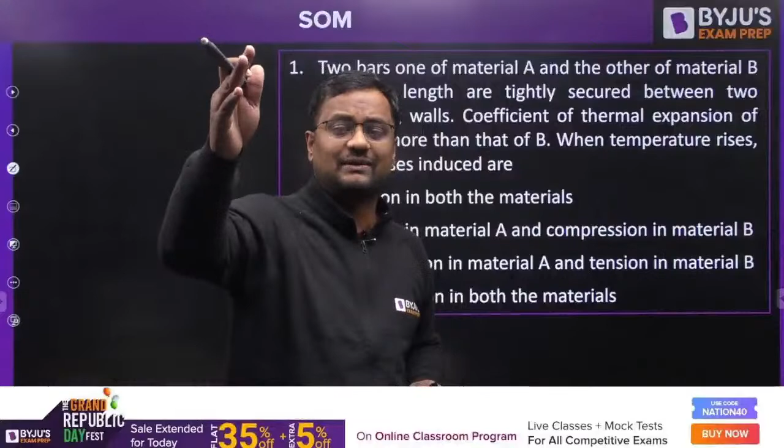Okay, now moving to the first question, guys. Please take your pen, copy, and calculator fast, and let me know the answers in the comment section so you can verify how other students are performing and how you are performing.

All the questions will be of GATE level, covering deflection, Mohr circle, every chapter—stress, strain, thermal stress, everything I'll be taking.

Here is question number 1, but wait, before that, a very important announcement. Guys, the cutoff for today's session, for SOM and FM—Joshi Sir will tell you his—but out of 25 questions, at least you have to solve 17 questions. If you solve 17 out of the 25 questions I'm taking today, then your preparation is the right strategy. 2, 3, 4 questions today, and the last, 25th question, will be a bit tricky, with higher difficulty. But on average, if you solve 17 out of 25, your preparation is exactly on the right direction.

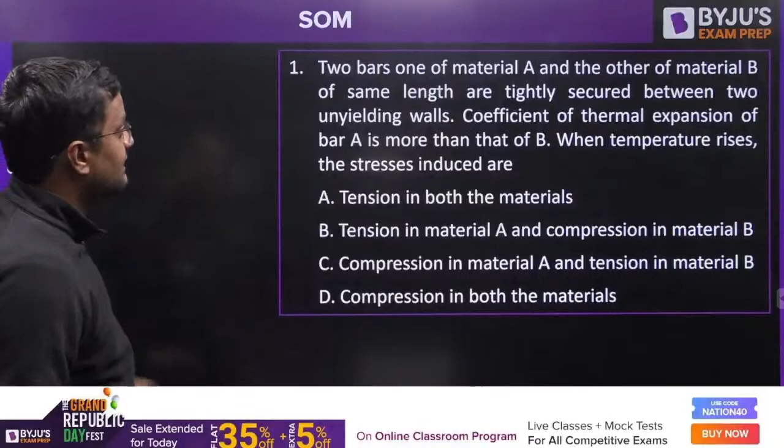Come to the question: 2 bars, one of material A and one of material B, of the same length, are tightly secured between 2 unyielding walls. Unyielding walls means there will be no deflection. There are 2 bars, one is A and one is B. The coefficient of thermal expansion of A is more than B, so alpha A is greater than alpha B. When the temperature is increased, 4 options are given.

Guys, unless I mention it, this will be MCQ, not MSQ. Because in GATE as well, whenever a question is MSQ, they will tell you explicitly—they won't play hide and seek with you. If there is an MSQ question, I will write it on the smart board or here on the screen you are seeing, just like in GATE.

So please let me know. Thank you, Santu—Santu, please share the session. Sagar Yadav, Vikram, Parth, everybody welcome, guys. Everybody welcome. Keshav, Rahul, Asha, excellent.

So many people are saying C, some are saying D. Nice question, a little tricky. Suraj is saying C—compression in A and tension in B. Aman is saying C. Santu is saying D. So who will be correct, Santu or the other students? Let me check, guys—you'll learn many important concepts and tricky questions from this session. Vishwa is also saying D. See, guys, if the question is about a composite bar, then the answer is C.

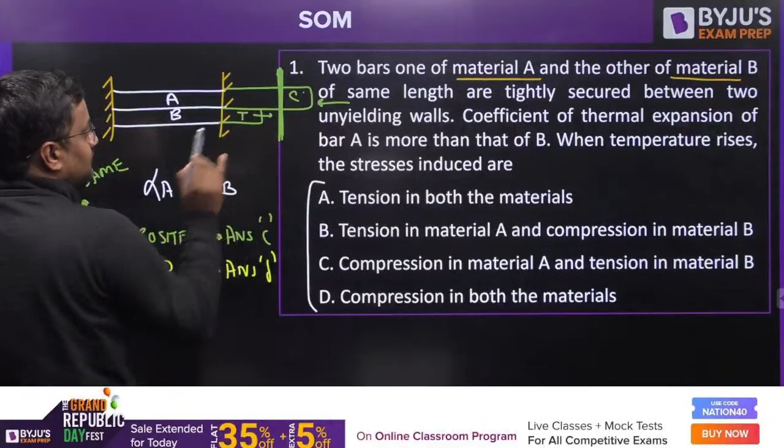Okay, but here what is written? Unyielding walls. And every time you are correcting, going for C, because you think composite, but the answer is C only in that case.

Here guys, it is unyielding, so both can't elongate by a single inch. Composite means they can elongate, but here A wants to elongate more, B wants to elongate less, but both can't elongate. So both will come into compression, and these forces will be restricted here. Both restricting here, so the answer will be...

D, compression in both. Everybody please put a heart sign if you got it.

And guys, such questions make your marks instead of +2, they will mark -2/3, that is 0.67. Everybody got the concept? Please let me know.

Yes, now the answer is coming D. These are the questions which you directly see and tick C, but the right answer is D. Everybody got it or not?

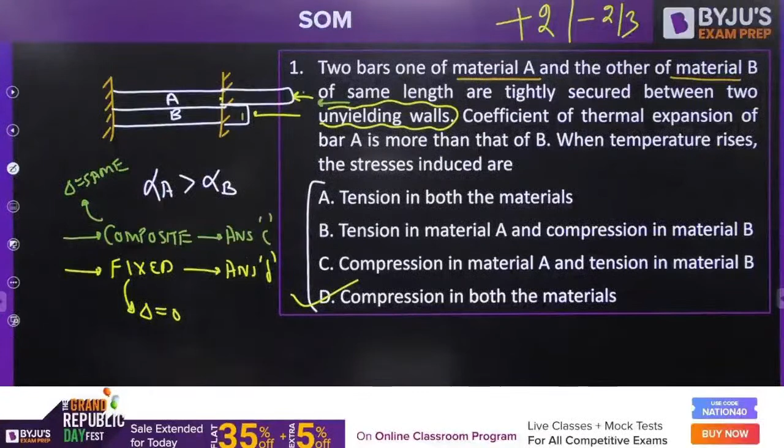Okay, and my level of difficulty will be increasing slowly. My level of this will be increasing slowly.

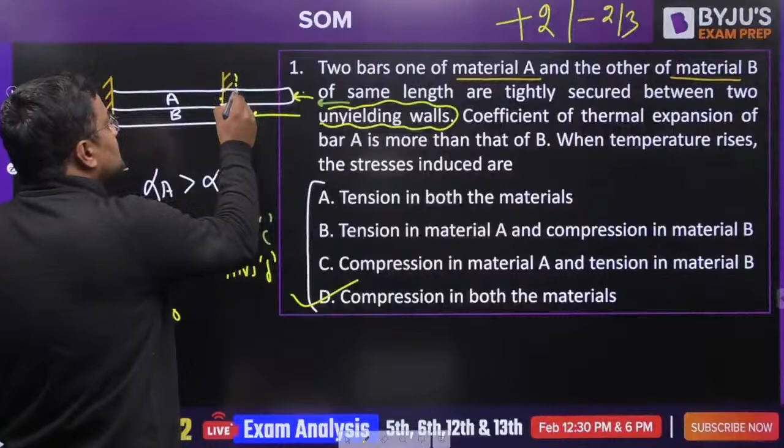If suppose, yes, Nagendra has asked a very beautiful question. If it is yielding up to this level, a very small amount, in comparison to L alpha delta T, this is the third type of concept. If it is yielding by a very small amount, very less than L alpha delta T, then also it will be compression. It is yielding up to here, it wants to elongate more, elongation more, again compression.

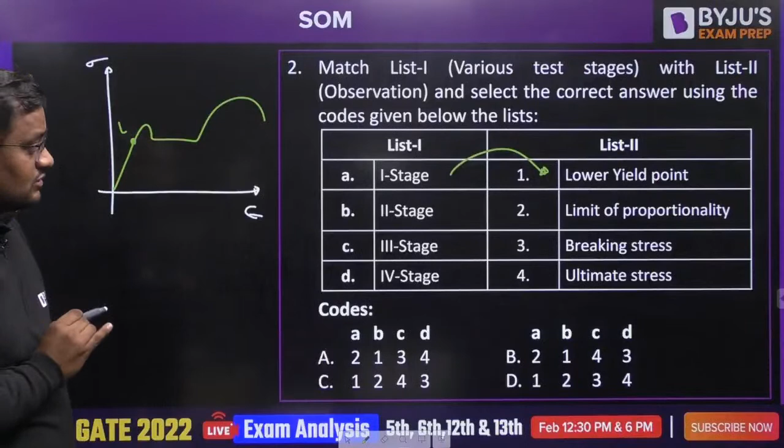Okay, lower yield point. Then after this, the first stage is the limit of proportionality. First is the limit up to which it is proportional. Then after that proportional limit, yielding comes. Here it is the lower yield point. So second is this. Then after this what comes?

Third stage is ultimate stress, sigma u. Then after this the material breaks down, fracture. Fourth stage is fracture. So it is 2, then 1, then 4 and 3. 2, 1, 4, 3. Option number B. Everybody got it or not?

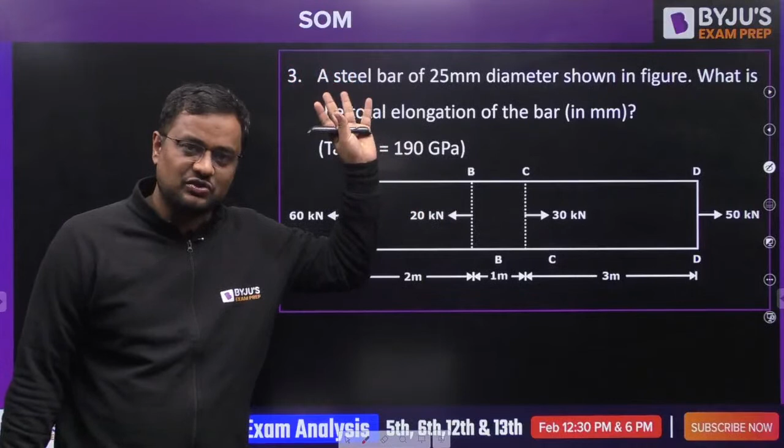Question number 3. Many of these types of questions we have done 6 or 7 months back on YouTube. Let's do this now. A steel bar of 25 mm diameter. What is the total elongation? See, guys, from childhood to now, what is my total delta? Elongation of my legs, elongation of my upper body, elongation of my head. So that is delta AB, elongation of this part, then delta BC, and delta CD.

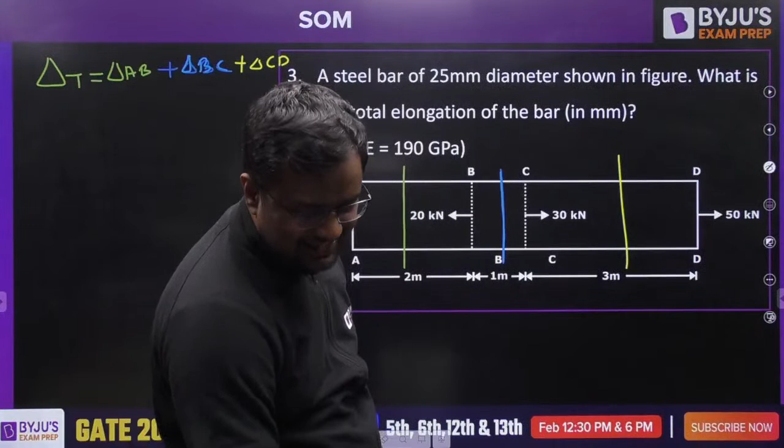Everybody please take out your calculator and pen. Then it will be beneficial. If you are only listening to me, this is not an entertainment channel. Okay, everybody khulja. Yes. Good, Santu. Please take out your pen and calculator.

Now delta AB, how to calculate delta AB? Cut your hand here, put your hand here. See from the left hand side: 60 going away. This is a NAT type question. Away going is tension, plus. 60 kN in newtons will be 60 into 1000. Length is 2 meter, 2 into 1000 in millimeter, upon area pi by 4 into d square, into Young's modulus 190 gigapascal. In proper units you can find it; I am not going into unit conversion.

And if you cut and see from the right hand side, then also 60 will be coming. From right hand side 50 going away, so plus 50. 30 going away, plus 30. 20 coming inside, inside means compression, minus 20. So 80 minus 20 is again 60. So whether you see from left or right, it will be the same.

Now delta BC. Again see from the left hand side: 60 going away, 20 going away, so 80. Length is 1 meter, area pi by 4 d square, into Young's modulus 190 into 10 to the power something. Even if you see from the right hand side, 50 going away, 30 going away, it is also again 80.

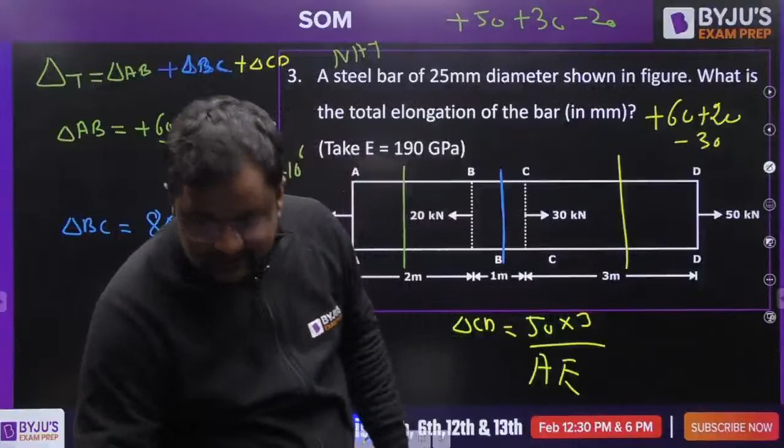Now delta CD. It is your choice. From left hand side 60 going away, plus 60, 20 going away, plus, and 30 coming inside, minus. 80 minus 30, 50. And from right hand side easily 50. So 50 into length 3. Area you know, Young's modulus you know. Calculate the addition of all these, you will get the answer. Giga means 10 to the power 9. Yes, thank you, Nagendra.

Can you do such type of questions in the GATE exam? Naak to nahi kataoge bhai meri. Everybody please let me know, got it or not? In the exam please don't do it from left and right both. Either way, the answer will be the same. Let us move to question number 4 quickly.

Okay, now this is fixed. So this is fixed means net force in y direction is 0.

Okay, sir. So force any direction. Here I don't know the force. Let it be this direction. Reaction from here, RD. And here also take any direction. If my answer comes in negative, direction will be opposite. Let it be RA. If my answer comes in negative, my direction is opposite.

So upward force is RA plus RD, and downward force is equal to 2W plus W, that is 3W. So for net force equal to 0, upward force RA plus RD is equal to downward force. Getting or not? Yes. Thank you. 3.725. Thank you.

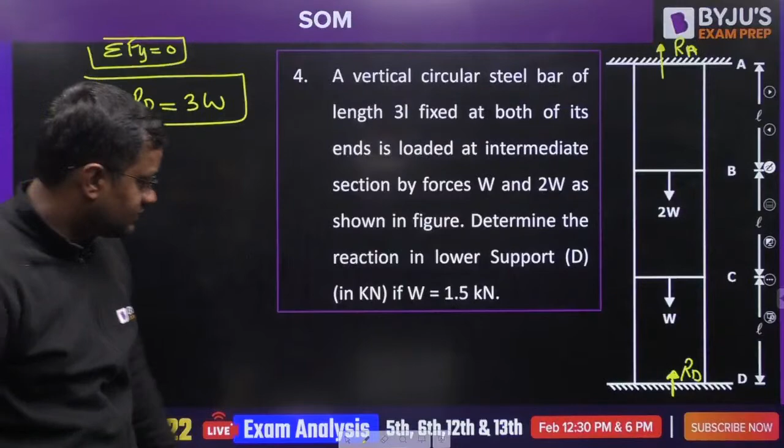Correct. Okay. Come on, tough questions, sir. Deepak, I will come gradually. Okay. Please don't teach me. Okay. Now, coming here. Okay. Deepak wants tough question. Deepak, if you don't want these questions, take a screenshot of question number 25. Take a screenshot, giving you 3 seconds. 1, 2, 3. Do this. Okay. Everybody come here. We'll move gradually. Okay. Thank you, Deepak.

Okay. Nagendra, you can make everything in SI unit. Answer will be in meter. At last, multiply with 1000 to get millimeter. Now W is 1.5, that we will take at the end. Now, since it is a fixed bar, net elongation is equal to 0, delta AD is equal to 0, and delta AD is equal to delta AB plus delta BC plus delta CD.

Okay, what is delta AB? See from top or bottom. I have just shown you in the previous. Let us see from the top. RA is going upward. So RA into L, all lengths are L, upon AE. Okay, now delta BC. See from top or bottom, your choice. Let me see from top. RA going outside, 2W coming inside. So RA minus 2W into length upon AE, plus delta CD.

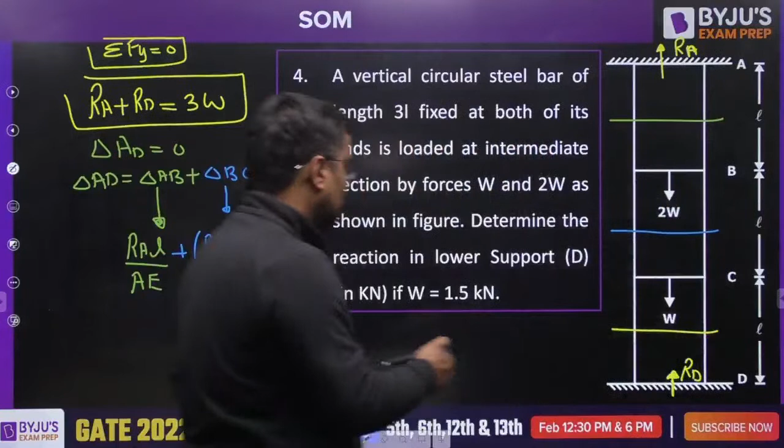Cut it here. See from top or bottom, your choice. Let us see from top. RA going outside, plus, and 2W going inside, compression, W also, so it will be minus 3W into L by AE is equal to 0. Now L, AE all are cancelled.

Okay, Bhagwan itni inki atma ko shanti de. Okay, now that is Ankit Joshi sir dialogue na.

Okay, RA plus RA plus RA, that is 3RA. And minus 2W and minus 3W, minus 5W is equal to 0. So RA is equal to 5W by 3. My answer is in positive. That means I have taken the correct direction. And what is W? 1.5. 5 into 1.5 by 3. So 3 cancels, that is 5 into 0.5, so that is 2.5. So RA value is coming to be

2.5. And RD is equal to 3W minus RA. Okay, so 3 into 1.5 is 4.5 minus RA 2.5. So from here RD is equal to 2. Everybody please let me know in the comment section. You got it or not?

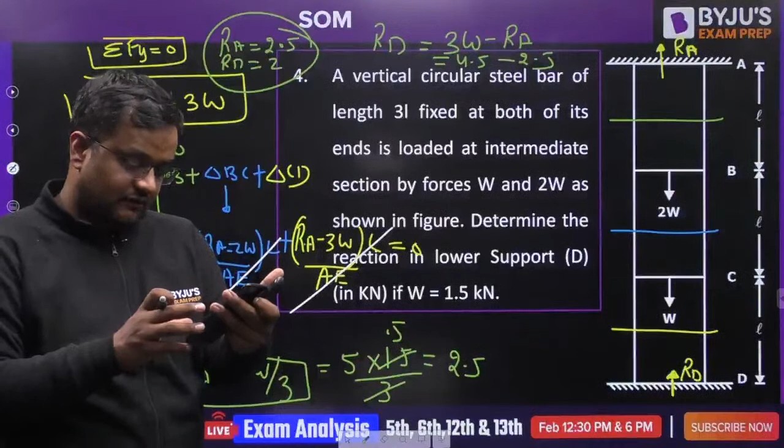Are you enjoying or not? Yes. Will you do such questions in exam or not? Yes, Santu, Rahul, good. Tough to tough. Okay, got it. Pravinder Singh, okay, good.

Question number now, guys, please be aware of the cutoff. 17th question, okay. So it is 17 out of 25 questions. And 15 questions I'll be taking tomorrow and in the YouTube channel. This is the question. Little bit the toughness is increased.

What they are asking, determine the load carried by the center wire, P1, P2. So here it is P1, okay sir. Here it is P2. Here it is P3. So total upward load on this bar is P1 plus P2 plus P3, okay. And total downward is 5 kilonewton. So to be in equilibrium, upward force is equal to downward force. Equation number 1.

Equation number 1. Okay, got it sir. No doubt. Okay, excellent. Any doubt? Okay, Kumar Gudu is saying, sir, please explain the last one, the delta calculation. We have just done PL by AE. For everything we have done PL by AE, nothing else.

For here also, see from upward, RA into L by AE. From here, see from upward, RA going outside, 2W coming inside, L by AE. For here, see from upward, RA going outside and 3W coming inside, like this. Everybody please let me know the answer fast. Kumar Gudur, I hope you got it now.

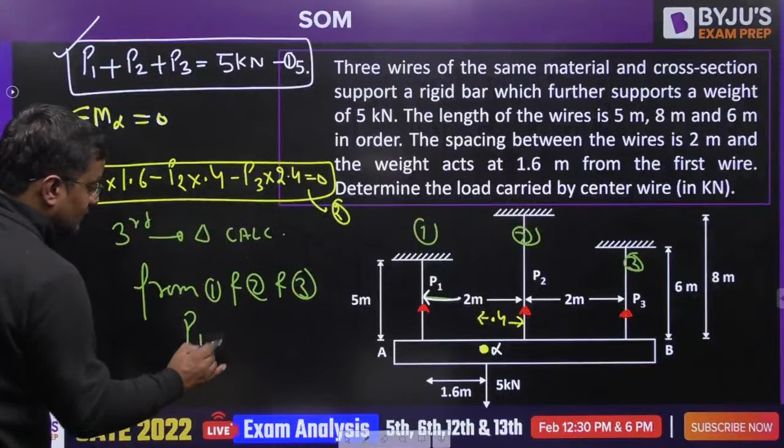So the third equation will be the delta calculation. From equations 1, 2 and 3, calculate P1, P2 and P3. And guys, wait. This question requires a certain amount of calculation and exercise.

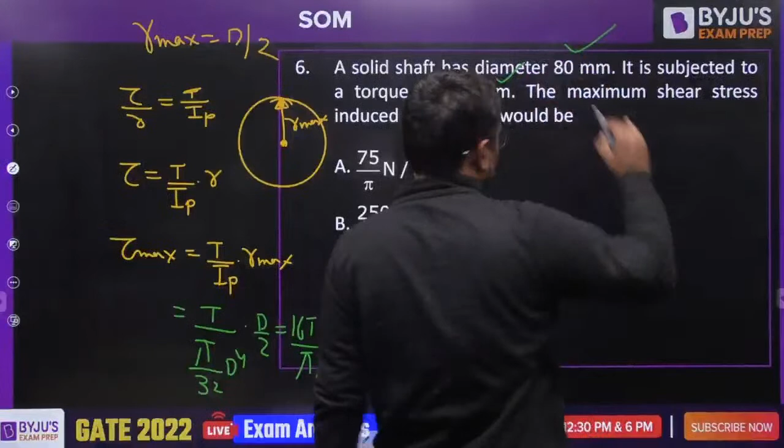So, here it will be T. IP is polar moment of inertia, that is pi by 32 into D to the power 4. R max is D by 2. If you simplify this, it will be 16T by pi D cube. Now, D is given, T is given, so you have to calculate 16T by pi D cube. T is 4 and D is 80 mm.

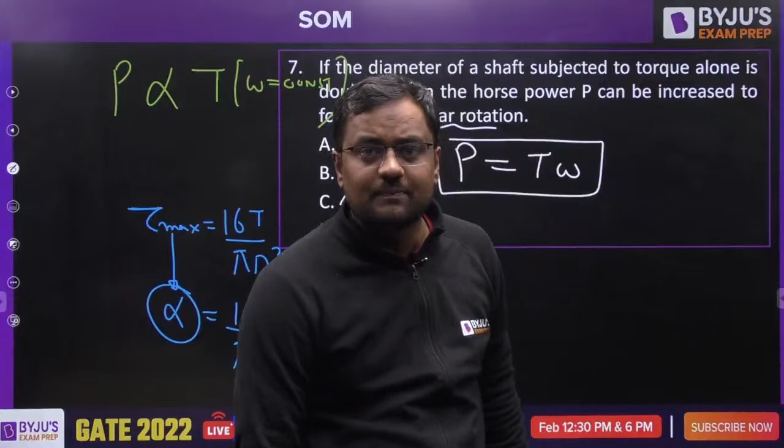Earlier it is alpha. Now since diameter is increased by 2 times, that is 8D cube, so we can increase torque by 8 times to make it the same value. Even if we increase the torque by 8 times, tau max is not exceeding the permissible value, so it will not fail. So T can increase by 8 times, and it will be 8P.

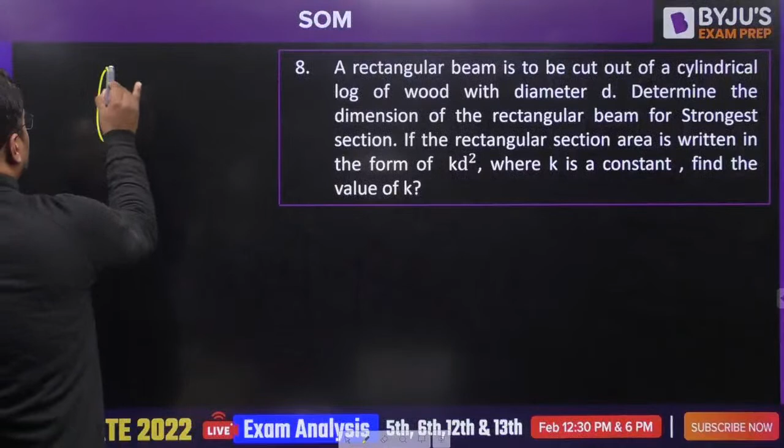Now question number 8. A rectangular beam is to be cut out of a cylindrical log of wood. Guys, see, this is a cylindrical log of wood. Now if I cut here, the cross section will be like this. How many rectangles can be cut? The rectangle may be like this, or like this, or like this. Guys, infinite rectangles can be cut out.

Infinite. Now, out of these sections, red, green, white, blue, purple, orange, dark blue, light blue, turquoise, out of the various colors in this universe, let I say that this one is the rectangle having width B and depth D to be the strongest of the various sections. Now for this strongest section, what is the value of B and D?

Because they are asking area, area will be B into D. And let it be not D, let it be H, because they have given the diameter as D. So diameter of this section is D, and I am taking this as H.

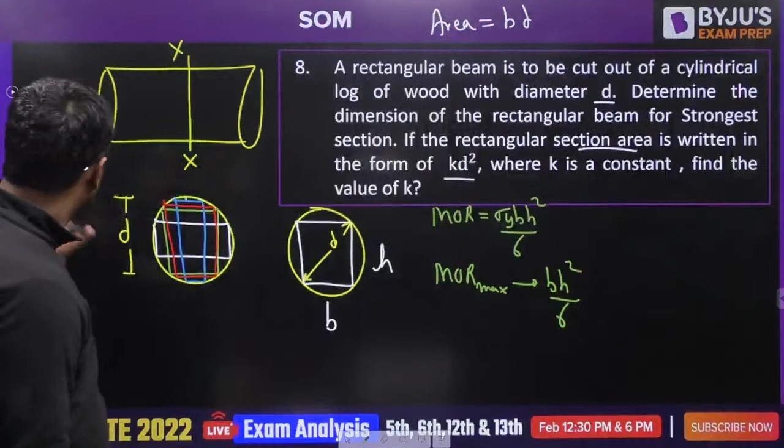Okay. Now here Pythagoras theorem you also know, I also know: B square plus H square is equal to D square. Now this is maximum. Now I can write BH square by 6. H square I can write as D square minus B square, by 6. Agree or not? Now this is Z. Actually this is section modulus Z.

So for maximum Z, dZ by dB is equal to 0. So what is differentiation of that? 1 by 6 BD square minus B cube. D is constant diameter. B cube differentiation is 3B square, equal to 0. D square is the constant. 1 by 6 will be cancelled out, and here B square is equal to D square by 3 and B is equal to D by root 3.

Now put this B is equal to D by root 3 value here and find H, and area will be B into H, because I have treated depth as H. So B you have calculated from here, H you will calculate from here, area will be B into H. Everybody please let me know, have you got it or not?

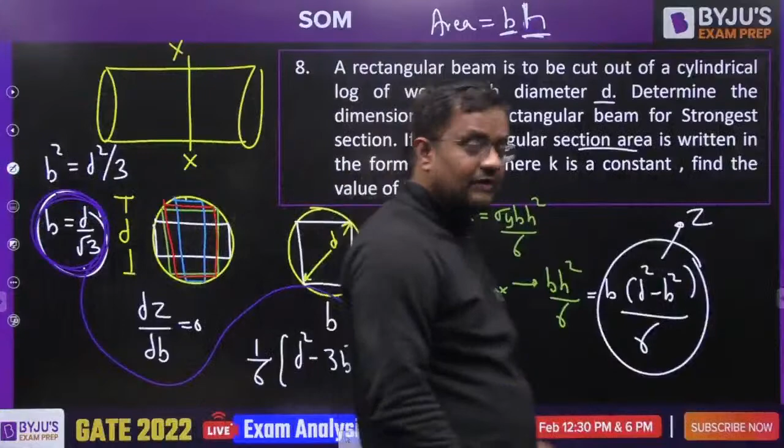Am I audible or not? Let me check on my mobile. Completely audible. Guys, I have told you the process. Have you got it? Any doubt? Shreyas, I am audible in my mobile, and I guess my mobile is much cheaper than yours. Okay. So it is audible on your mobile as well. Any doubt? No doubt.

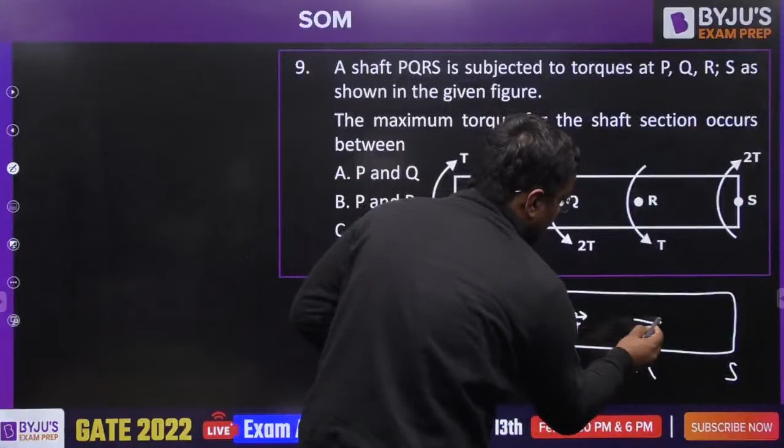Curl your fingers like this. Thumb will be like this. So at Q, curl your fingers, thumb will be there, so it will be 2T. Again curl your fingers, this will be here. Everybody getting this right hand thumb rule or not? Now curl your fingers, it will be here.

Okay, this is 2T. So net torque to the left hand side is T and 2T, 3T, and towards right hand side 2T and T, 3T. It is balanced. Now what is the benefit of right hand thumb rule? If I want to calculate torque at PQ, see what is the use. Everybody knows how to apply right hand thumb rule now.

Everybody knows now how to apply right hand thumb rule. Now what is the benefit? Benefit is like that. Now if I want to calculate torque, now it is easy for me to visualize. Otherwise here it will be difficult.

See how to visualize? See PQ. From left hand side, T going away, so plus T from left hand side. From right hand side always, 2T going away plus T going away plus 3T, 2T coming inside. Again, 2T going away plus T going away plus 3T and 2T coming inside. So net is T, from any side. And your sign convention might be different, you take outside going minus, inside coming plus. That is also acceptable.

So now I am calculating T in QR region. Cut here, you can take any sign convention. T going outside, from left hand side, and 2T coming inside. So net is minus T. Your sign convention may be reverse, that is obvious. From right hand side, 2T coming inside minus, and T going outside. So net is inside coming T. Somebody take it plus also, that is acceptable. So here it is T, here it is also T.

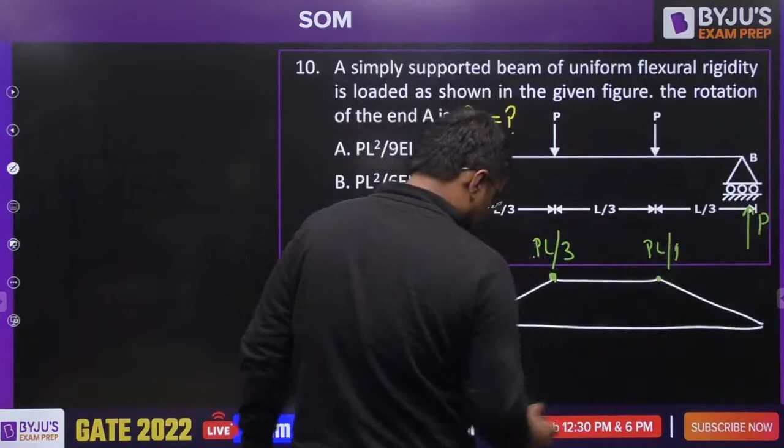Please let me know answers on the comment box. PL by 3. And M by EI diagram, I'll divide by EI here. I will be dividing by EI. Got it? Please let me know the answers. PL by 3EI, PL by 3EI. This is M by EI diagram.

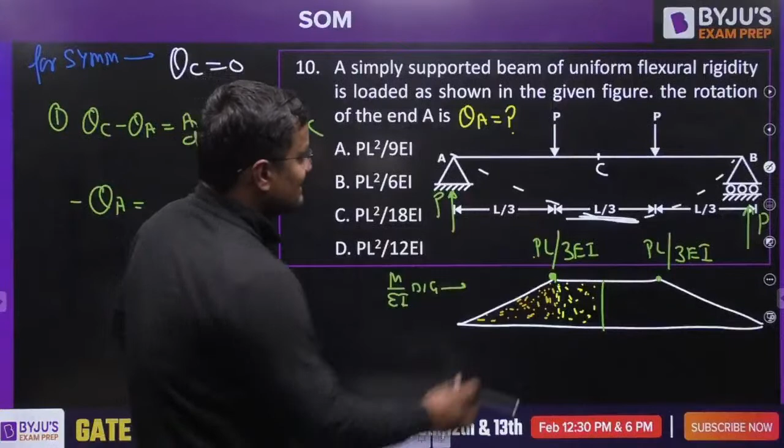Okay, what is this distance? L by 2 minus L by 3. L by 2 minus L by 3 is equal to, taking LCM 6, 3L minus 2L, it is L by 6.

So this area is L by 6. What is that yellow area? L by 6 into height, that is PL by 3 EI. Okay sir, got it sir.

And what is orange area? Orange area is half base. Base is L by 3 into height. Height is PL by 3 EI. So this will be PL square by 18 EI, and this will be PL square by 18 EI, so it will be PL square by 9 EI. That is option number A.

How many of you are correct here? Here is the telegram, and for that homework question I'll be posting the solution exactly at 11:30. Just let me know.

Parth was correct, good Parth. Good Somprit. Every commando is here, yaar. Here are the real audience who are doing most of the questions correct.

Are you enjoying this session so far, guys? 25 questions. See, deflection we have done till now. We have done deflection, we have done thermal stresses, and now Mohr circle is also coming, guys, with some beautiful new type of questions.

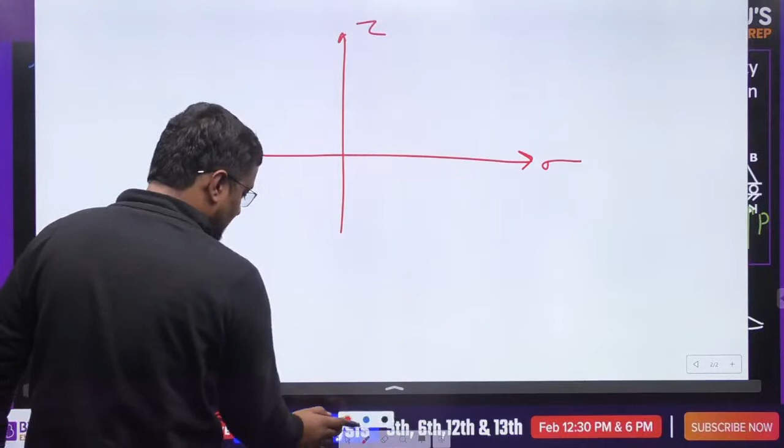Mohr circle for a point is like this. This is 20 tension and this will be minus 30, meaning this and this. What is major principal stress here? This is 30. Let me check how strong are the commandos here.

Okay guys, major here is this one, this one is major and this one is minor. Major does not mean that on positive side. SOM negative does not mean less, it means different direction compression.

Okay, this one now. Everybody, the propped cantilever is fixed at a nice question. Okay, this is a propped cantilever, fixed at A and propped at B. Okay sir, okay sir.

Now what is happening here? UDL of 1 ton per meter, that is W, W is this. What is the reaction at B? What is RB? They are asking, what is RB?

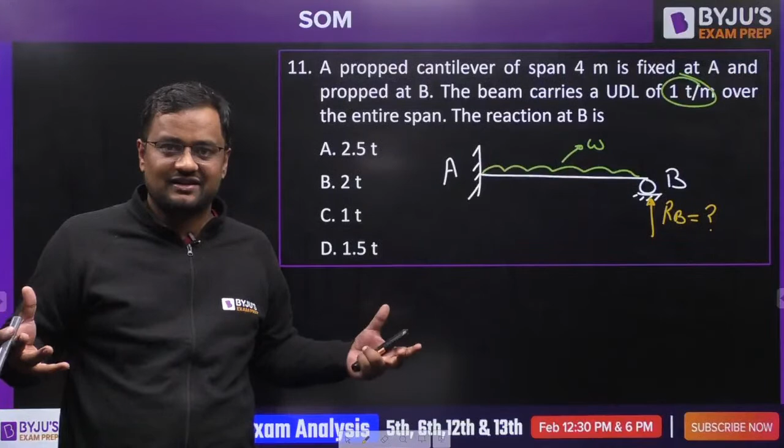Everybody, 30, 40, where did that come from, Ishan? Where did 40 come from? What have you had, brother, give me some too, having a lot of fun. Ishan, where did 40 come from? 20, and the fight between 20 and 30, how does 40 come? Okay, you are saying just like BJP and Congress are fighting for election, and suddenly AAP is winning, that happens in Delhi, but not here.

Okay now guys, see, the actual deflection at B is equal to 0, yaar, because B is the support. At B it is a support, so delta B is 0.

Now this UDL, green color UDL, is putting it downward by this amount, and RB is putting it upward by this much amount. RB into L cube by 3EI. Now both cancelled.

Jai ho, now from here you can find RB. From here RB is equal to 3WL by 8. L is given, W is given, 3, W is 1, L is 4, by 8, so from here D is the option.

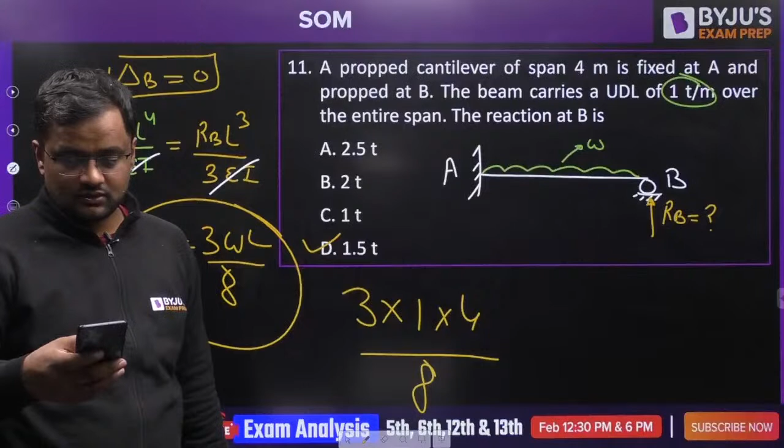Can you do such questions in exam or not? It's okay Ishan. Can you do such questions in exam or not? Everybody please let me know. Can you do such questions in exam or not? Okay, you won't embarrass yourself, right? You won't embarrass yourself? You'll manage it?

From here, you can get the answer.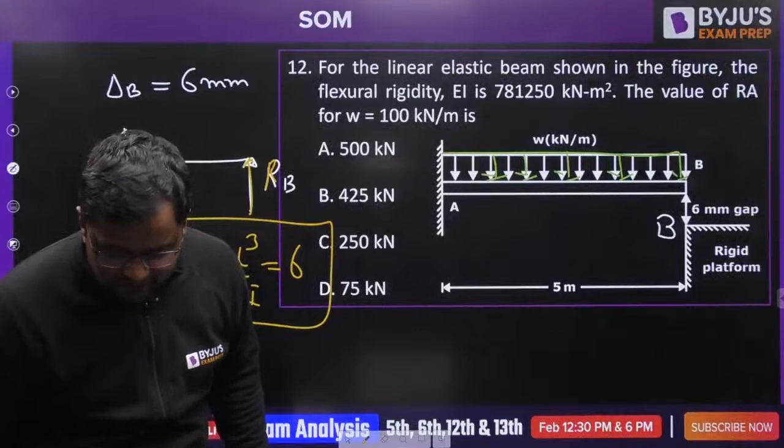Everything is written. Net elongation is 6 mm. I'm not wasting your 5 to 10 minutes in calculation that you can do on your own, guys. Just let me know, are you able to solve such questions in exam or not? That is my motive right now. Don't focus on my energy, whether I'm putting more or less energy. Go in the concepts, go in the questions.

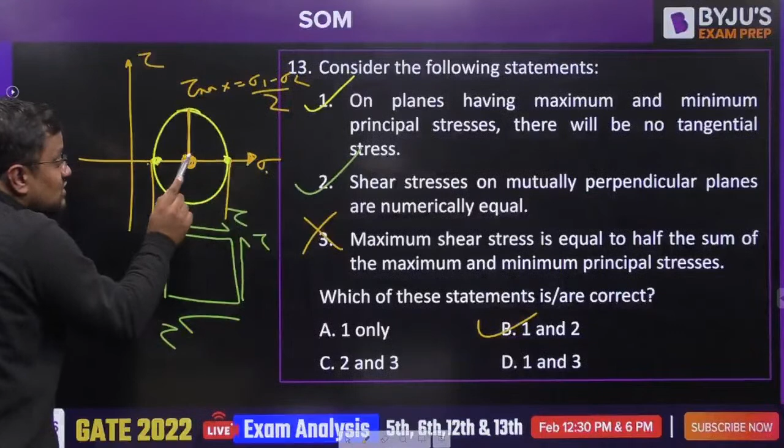Sorry, what is the normal stress on the plane of tau max? What is the normal stress, x value, on the plane of tau max? Then option 3 will be correct. This value is sigma 1 plus sigma 2 by 2, but tau max, the radius, is sigma 1 minus sigma 2 by 2. Everybody got it or not?

I told you, okay Anurag, I told you when the answer will be 3. When the answer will be 3, when it is asked not maximum shear stress, if they ask normal stress on the plane of tau max, then this will be correct.

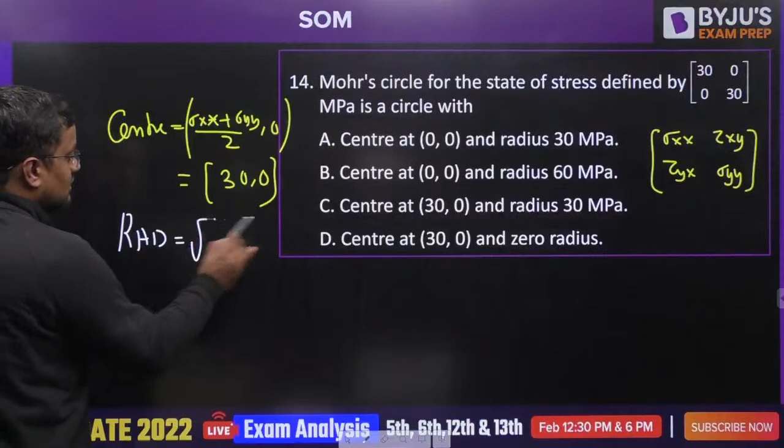Okay. Now, what is the center? Center is sigma xx plus sigma yy by 2, 0. So it will be sigma xx plus sigma yy, 60 by 2. That is 30, 0. Okay. And radius is under root of sigma xx minus sigma yy by 2 whole square plus tau xy square. So sigma xx minus sigma yy by 2 whole square, that is 0. So it is equal to 0.

So how will this look? Let me tell you. The center is 30, 0. And since both principal stresses, sigma 1 and sigma 2, are 30, both are same. So it is not like this. If it is like this, then the principal stress here is different, here is different. Here both are same. And why are they principal stresses? Because tau is 0. So center 30, 0 and radius 0. D option. Everybody is correct here.

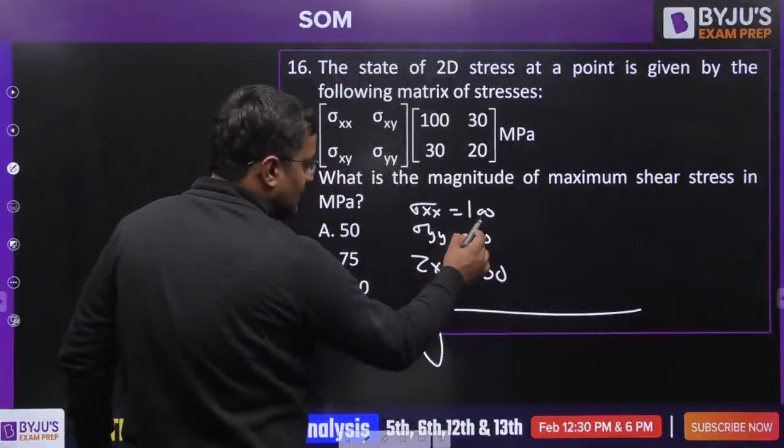Now, what is the magnitude of maximum shear stress here? Again, sigma xx is equal to 100, sigma yy is equal to 20, tau xy is equal to 30. Applying the same formula again, sigma xx minus sigma yy by 2 whole square plus tau xy square. So 100 minus 20 is 80, by 2 is 40, 40 square plus 30 square. Not wasting time here.

Question number 17. This one is a little bit tricky. Let us see who can do this question. Everybody, this is a little bit tricky.

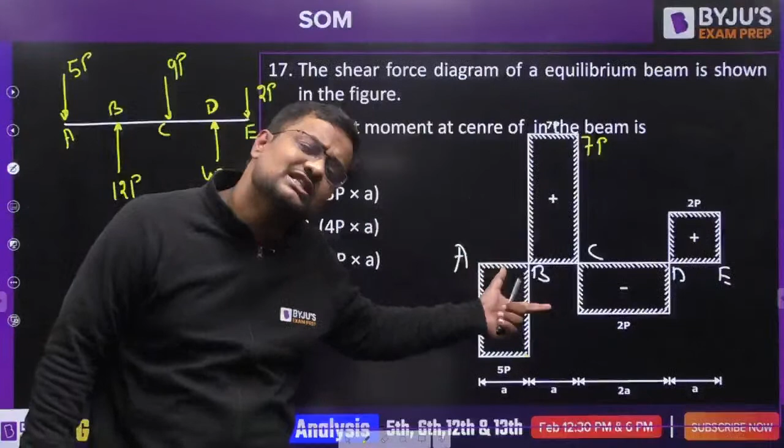The diagram we obtain from the SFD will always satisfy force equilibrium. Let us see. Downward 5P, 9P, 2P. 5, 9, 14 to 16P downward. And upward is 16P. So it is balanced. It will always satisfy force equilibrium, whether it satisfies moment equilibrium or not.

Now, the net moment for a body in equilibrium will always be 0. Guys, in SOM many times I ask my students what is the moment here at support A. They say PL. No, the moment is 0. This P upward, this PL here. So P into L clockwise, this PL anti-clockwise. Net moment from right and left both is 0. Even here also the moment is 0.

From the right hand side, if you take L minus X or whatever distance, at this point also it will be 0. Calculate from right and left, it will be 0. So without doing all this calculation, I can directly write the answer as A. Got it or not?

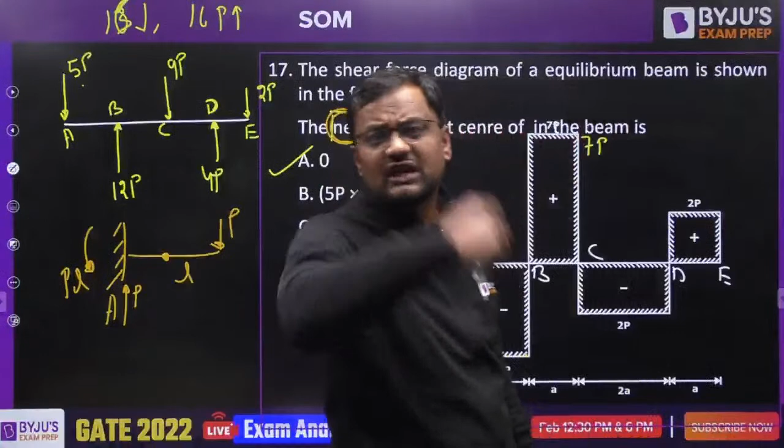It's okay. Enjoying, guys? 17 questions we have done till now. Moving to the 18th question. Beautiful question. Let me tell you what the question is. Now see, this is a simply supported beam. On this simply supported beam, there is a column, and the column is having some weight P. Let it be A, let it be B, let the center be C, this be D, this be E. What is the shear force at C?

Beautiful question. A beam has a column. Now, how to do such questions? Everybody, Tanveer, please see. This is B, this is A, and the load is actually acting as a UDL over it. See, guys, this on my hand is a point load. This marker on my hand is a point load. But this is the remote, and if I apply load like this, the point load is on the remote.

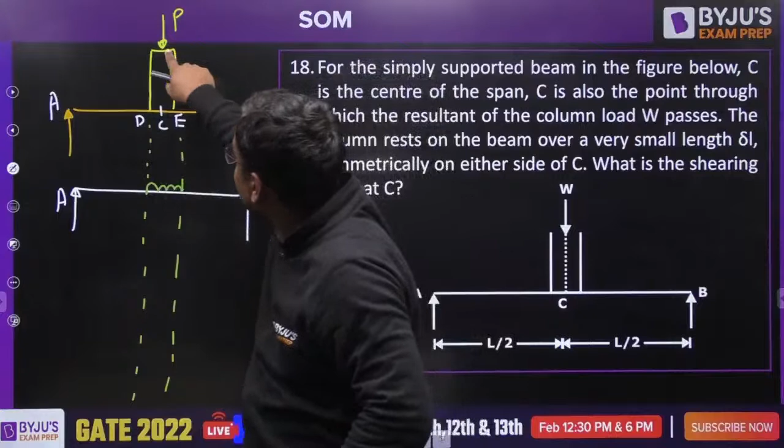Point load is on the remote. But on my hand it is applying UDL. So it is not asking the shear force of this place. For this place it is point load. But for the DE region it is UDL, like this.

Now if you make the shear force diagram, many times I have done this. From the AN method you can do it in just 2 seconds. Abhinav Negi AN method, you can search it on YouTube. Bending moment diagram is like this. And for every symmetrical question, SFD is always anti-symmetrical and BMD symmetrical. So shear force is 0 here.

Everybody understood this or not? Enjoying Avinash, Parvinder, Dinesh, Naresh, Meena, Anurag, everybody enjoying the session or not? One question was homework that I'll be giving you in my Telegram, Civil by Abhinav sir.

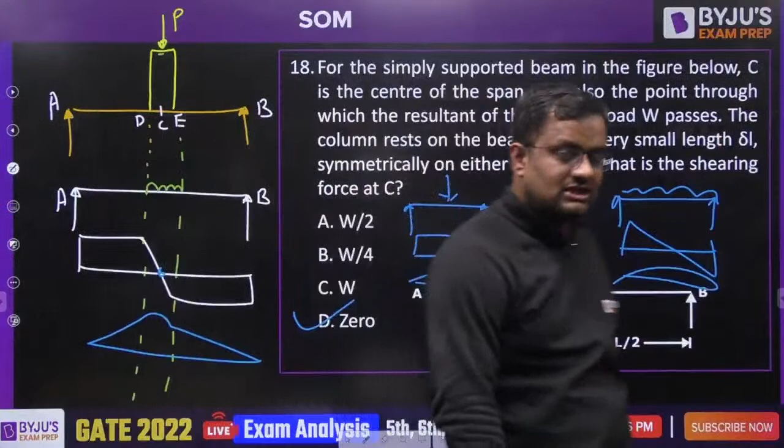Everybody, are you feeling excited, energized, and are you getting something? Out of 18 questions till now, how many are correct? Please let me know in the comment section. All civil and mechanical champions, how many correct? Dinesh is saying 0. Okay, Bhavi is saying 18, Anurag is saying 15. Excellent. Parath is saying 9, Rishi is saying 10. A couple of people have already reached the threshold.

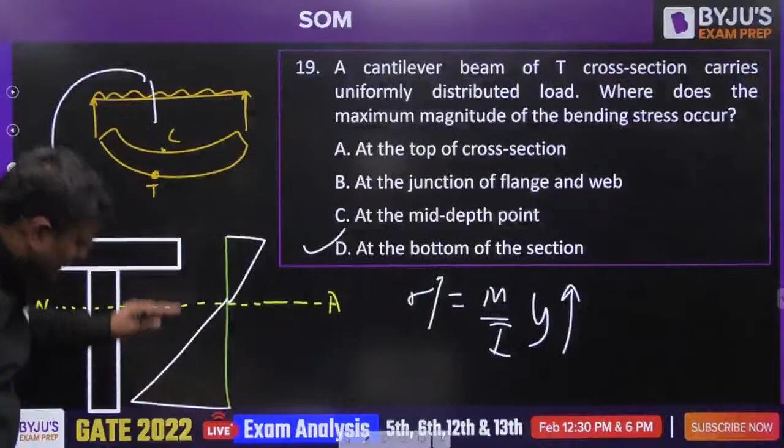Sigma is equal to M by I into y, where y is the distance from the neutral axis. Below there is more depth, so the answer is D. Everybody got it or not? Whether it is cantilever, in a cantilever there is tension at top. They are asking magnitude of bending stress, not tension, not compression. Still the answer will be like this. Here it is compression, here is tension.

Got it? Yuvraj Singh is also here, the friend of Dhoni.

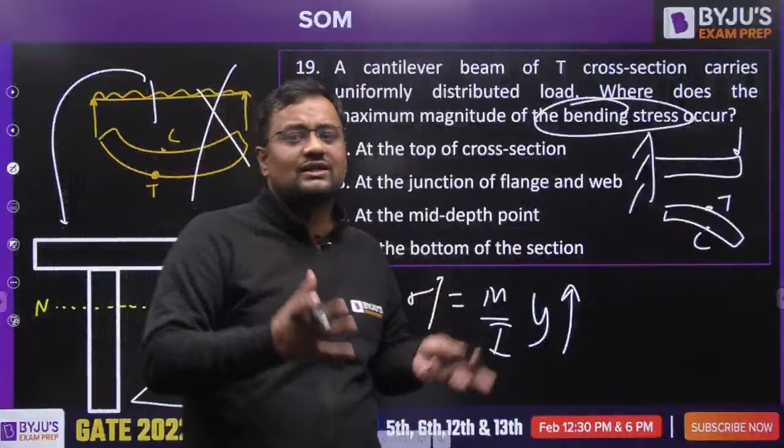Okay, and don't blame anybody, yaar. Please concentrate on studies. You people are very young, 20, 21, 22, 23, 24. So don't go anywhere. Just stay strict to your studies, whether the exam will be on time, before time or after time. Studies will always help you ultimately.

तुम कहीं भी फंस जाओ, your parents will always help you. Similarly, if the exam is preponed or postponed, we are always with the student community. We always genuinely believe their problems. But one thing: whether it is postponed, on the same day or even preponed, studies will always help you.

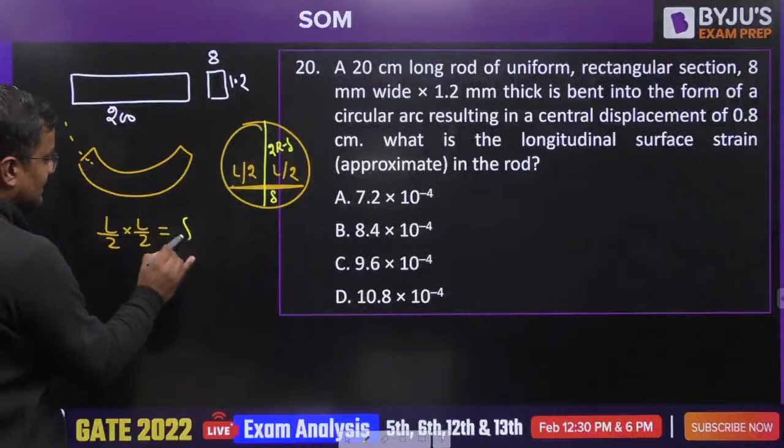Guys, you can only solve this when you know the property of a circle. If this is a chord and this yellow one is a diameter, the diameter from the center will break the chord into equal parts. This is delta and this is 2r minus delta. Even if you are a champion in SOM and you don't know this property, you can't solve this question, I can guarantee you. That's why practice is also important.

Apart from concepts, practice is also important, because even if you are a PhD in SOM, if Abhinav Negi has taught SOM for the last 10 years, 50 or 60 times, if he does not know this property, he can't solve this. So L square by 4 is equal to 2r delta. Minus delta square can be neglected because they are saying approximately; delta is very small. So delta is equal to L square by 8r. Okay, sir. Got it, sir.

Now strain. Guys, whenever strain is asked, you have to make strain in this equation. Because this is bending, this is not P by A, not force by area. So sigma by E is equal to y by R. Strain is equal to y by R, and strain maximum is equal to y max by R. Y is the distance from the neutral axis, so y max is 1.2 by 2. So 0.6 by R.

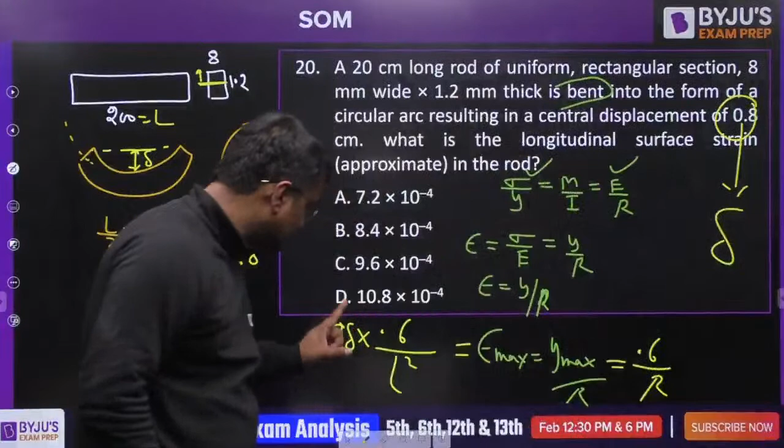R is equal to L square by 8 delta. Now L is given to you, 8 is given, and delta is also given, 0.8. So delta is given, L is given, 0.6 is given. These are the two most beautiful questions, 20th and 25th. This is the 20th question.

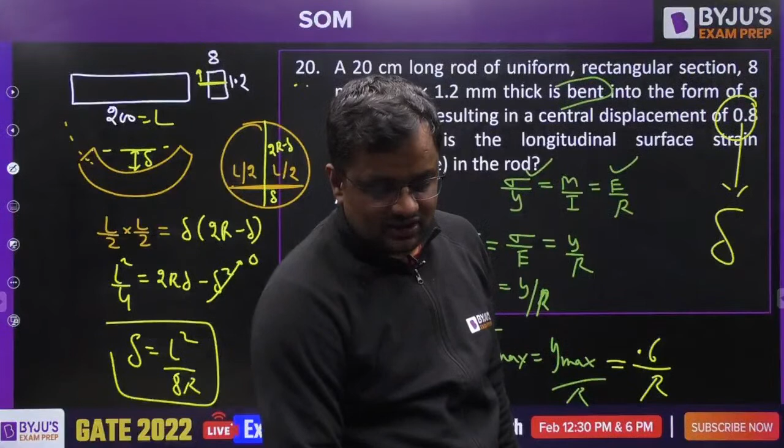And guys, let me again tell you, from last 1 week I am working on this, and I want to make the number of questions as less as possible, so that your time is not wasted. By shrinking the number of questions, I was able to shrink it to 40 questions to complete SOM. Of the 40 questions, 25 I am taking today, and 15 I'll be taking tomorrow.

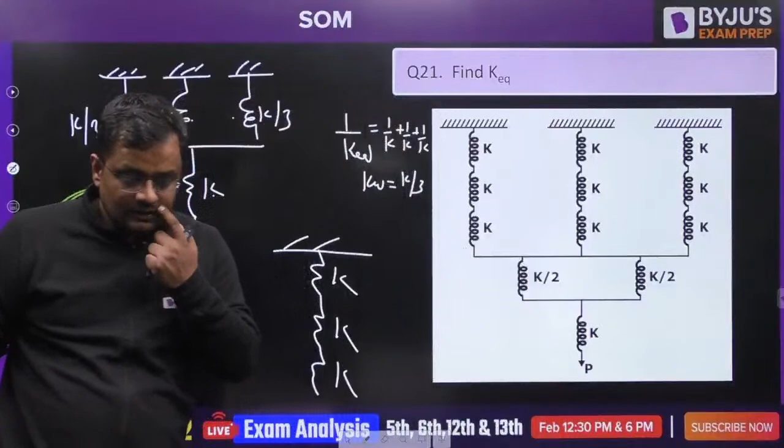Everybody, understood or not? Please let me know. Understood or not? Please let me know, guys.

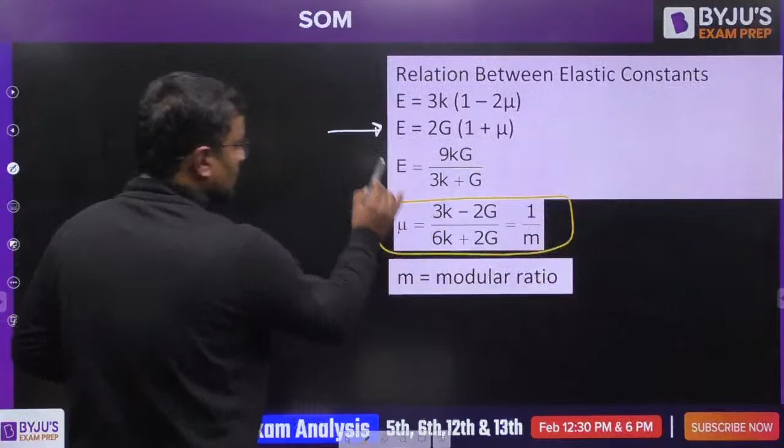Let us go with A now. G is equal to 2K. Now see this. Mu is equal to 3K minus 2G upon 6K plus 2G. These are relations between elastic constants, I'll give you in PDF. Mu is equal to 3K minus 2G, I'm very bad in remembering formula, upon 6K plus 2G. So G is equal to 2K: 3K minus 2G, with G equal to 2K, upon 6K plus 2G.

So this will again be in minus. 3K minus 4K, that is minus K, upon 10K. So minus 0.1. So minus is also not possible. So this will be the answer. Because when K is equal to E, see this relation: E is equal to 3K(1 minus 2 mu). So when K is equal to E, this will be cancelled. It will be 0.33 equals 1 minus 2 mu. So mu is equal to 0.33. That is possible.

Everybody please let me know. Have you enjoyed this question or not? Please let me know.

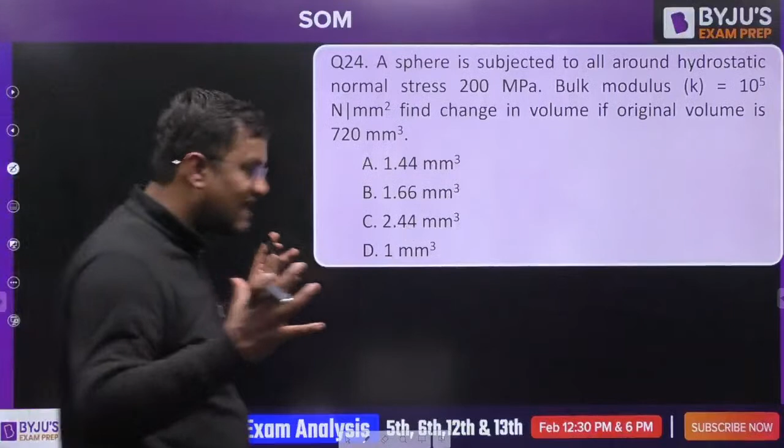Okay, now 24th, and after this the last question, 25th. Now what is this? Bulk modulus is equal to sigma by volumetric strain, and volumetric strain is delta V by V. K, the bulk modulus, is given, sigma is given as 200, and V is given as 720. You also know calculation, I also know calculation, not wasting time in that.

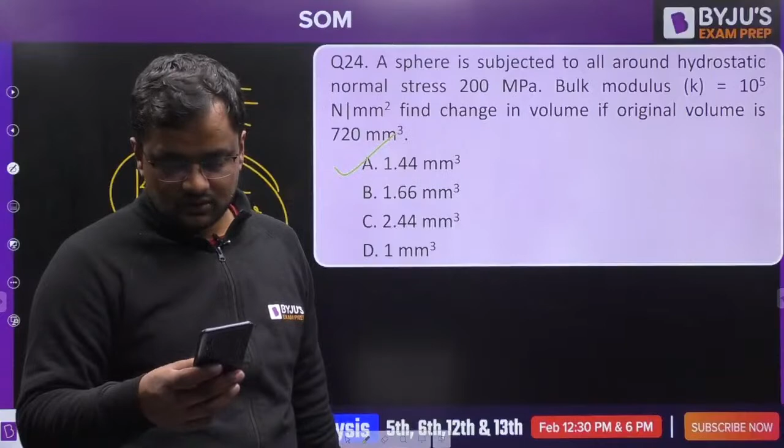Now the last question. Are you ready? Let me just inform Joshi sir also. Is he ready? Okay. Are you ready, sir? And this is question number 25. Everybody, first of all, please tell me who are seeing this first time.

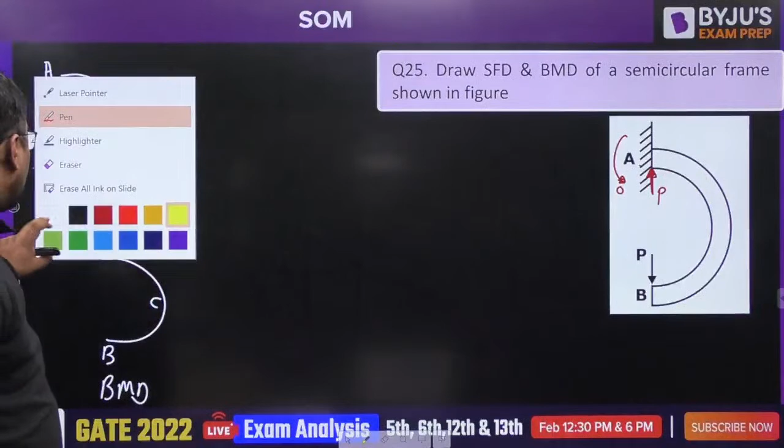Now, I have to make shear force diagram here. A, C, B. Here I'll be making SFD. Now I will draw a line like this, and here I'll be making BMD, A, C and B. Now everybody please see. Let me cut a section here from the center. This is center O. Let me cut a section like this, named 1. And I cut a section like this.

Name this as 1. Please see it very, very precisely.

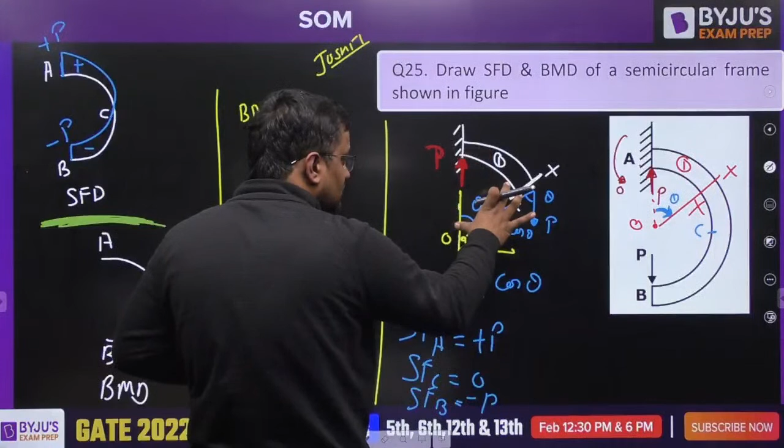P is here, and this perpendicular distance, this is R. So this is R cos theta, this is R sin theta. See, this is R, this is theta, so this is R sin theta.

So P into perpendicular distance, P R sin theta. So bending moment at A, there theta is 0, so it is 0. Bending moment at C, theta is 90, so PR. Bending moment at B, theta is 180, so 0. Here it is PR, and here it is again 0.

This is not 1 degree, this is not 2 degree, this is trigonometry function. And from 0 to 180, sin theta is positive.

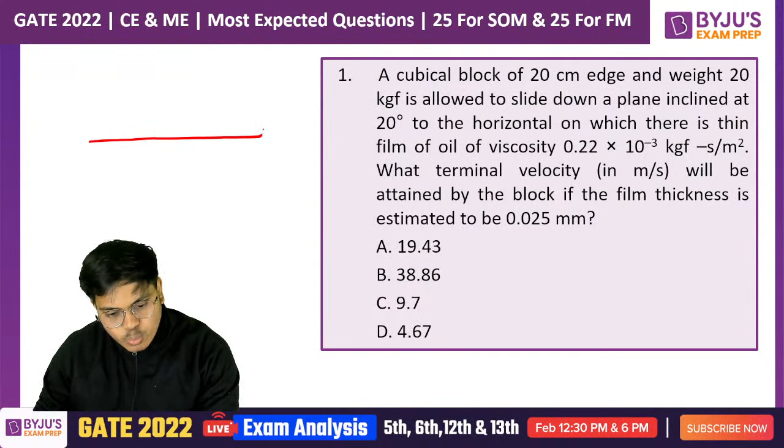The same PDF, you will be getting 20 degree, and as you know there is a thin film also. There is a full thin film as well, as you can see here. This is a thin film, right? And now please understand everybody, there is a box, the cubical block, on it. Now please answer this beautiful question.

What is going to be the terminal velocity? Full power! Please let me know in the comment box right now.

Let's do the force analysis first, then we will be closer to the correct answer. Okay, let's do the force analysis for this question.

So if I see this block, do I know the weight of the block? Yes, I know, right? It is 20 kgf.

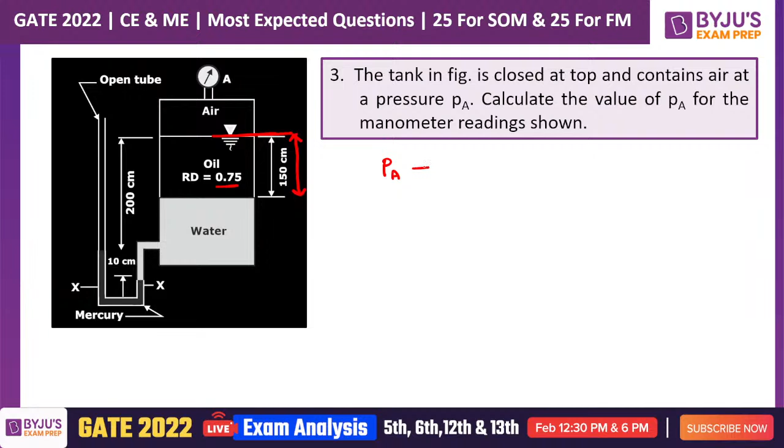How much down? Until the fluid changes, the density is getting changed, so it will be up to 150 centimeter, after which the density changes. So my pressure will be, because of this oil, rho GH. Density will be 0.75 rho G. Rho is taken as 1000, G is 9.81, and H will be 150 centimeter, that is 1.5 meter.

Again coming down till this point, until a new fluid comes into the picture. So from here to here, how much is the distance, everybody? So 200 minus 150 will be 50. This will be 50 centimeter and the remaining is 10 centimeter. So again coming downward only, so plus rho GH. How much is the rho? This is water only, so I know rho, G, and H value is going to be...

0.6 meter. Now, the value of this pressure here and here - please remember the mercury level is up to this place, so don't make a mistake here. Now we have to go to the upward side.

So minus 13.6, that is the rho into 1000, into 9.81, and 10 centimeter, that is nothing but 0.1. So from here we need to get the value of PA. Tell me quickly what is going to be the value. Does anyone have a doubt in this question? Whatever I have told you just now, if you have a doubt, please let me know.

Everybody, please let me know. If you have any kind of doubt in this particular question, let me know right now in the comment box. You can see me, right? अभी screen पे हूँ ना मैं?

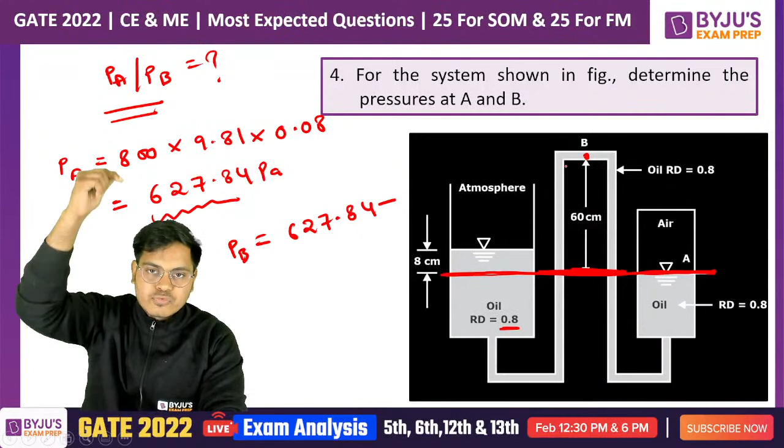Full power. So PA we have got like this. What about the PB value? I want PB value now. So guys, we know the pressure at this level. So let's write down 627.84, and I'm going to subtract, because we are going upward. Abhi upar ja rahe, if we are going to the upward side, the pressure is going to be reduced. So that's why minus rho GH again.

So 800 is the density, G is 9.81, H is 0.6. Why? Because height is 60 centimeter. So from here you will be getting 4080.96 Pascal. Can you please tell me, will it be negative or positive? Quickly tell me. Jaldi batao, quickly. I need the ratio.

I'll just verify. 800 into 9.81 into 0.6. Yeah, it is correct. Minus mein. So PA by PB is going to be how much? I have PA as 627.84 divided by the answer that I'm getting, and that would be 0.1538.

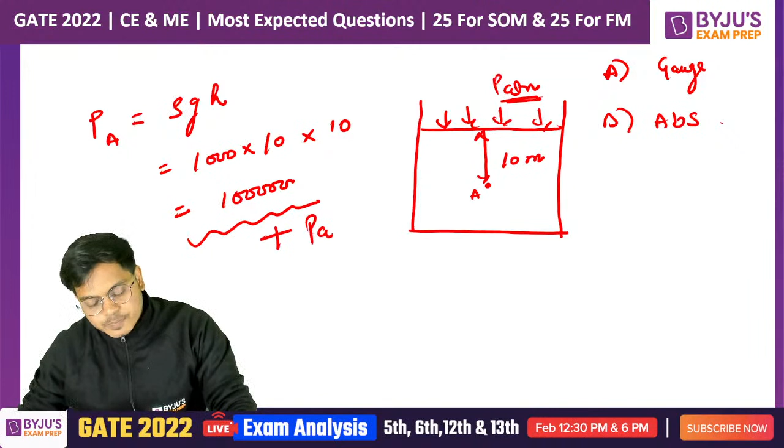Okay, great. So this is the thing that I want to tell you. When you are finding it like rho g h, this is what we all do, right? The whole pressure chapter is based on this equation, rho g h, hydrostatic law. When I have got this, I have got the gauge pressure only. When I add the atmospheric pressure which is applied on the surface, now it has become the absolute value. Correct? Everyone.

Please answer this question now, everybody. A horizontal oil tank is in the shape of a circular cylinder of radius r with hemispherical ends. If it is exactly half full with oil of specific weight gamma naught, estimate the ratio of magnitude of the vertical component of resultant hydrostatic thrust on one hemispherical end to that of the horizontal component of the thrust on that end. Basically, you need to get the ratio of vertical force by horizontal force. Quickly let me know in the comment box.

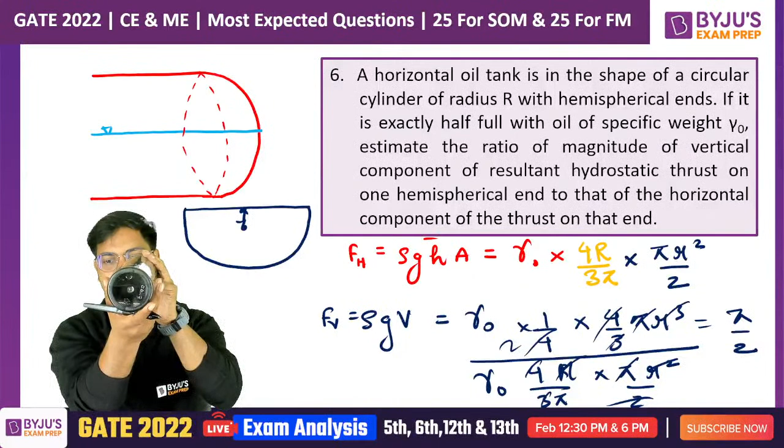I'll show you here so that you can clearly see. Can you clearly see the semicircle over here, everyone? Okay, now moving on to the volume. What is going to be the volume? Suppose this is the sphere. The fluid is filled up to this level, and we are only talking about the curved surface over here. So 1/4 of the sphere we are getting.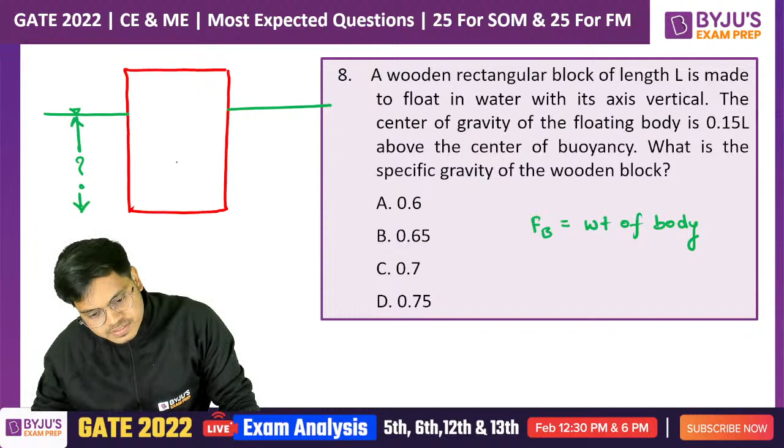Okay, suppose it is floating, right? What I want is this value: the buoyant force is equal to the weight of the body. But for that, I'll be needing the value of the depth of the float, depth of submergence basically you can call it. This is what I need. In the question, they have said that, suppose this is the center of buoyancy and suppose this is the center of gravity. In the question, they have said that center of gravity is 0.15 above the center of buoyancy, 0.15 L. Simple, beautiful, correct?

Okay, now please see here everyone. If this is CG here, I know the CG will be where? It will be at the center of this whole block. So this will be how much? 0.5 L. Correct, because CG will be at the center only. So if this is 0.5, this is 0.15, how much is this remaining? This will be 0.5 minus this 0.15. So 0.35 L is remaining. As you know, center of buoyancy is 0.35 L from the bottom. So this complete depth of submergence will be how much? Just double this. So it will be 0.7 L.

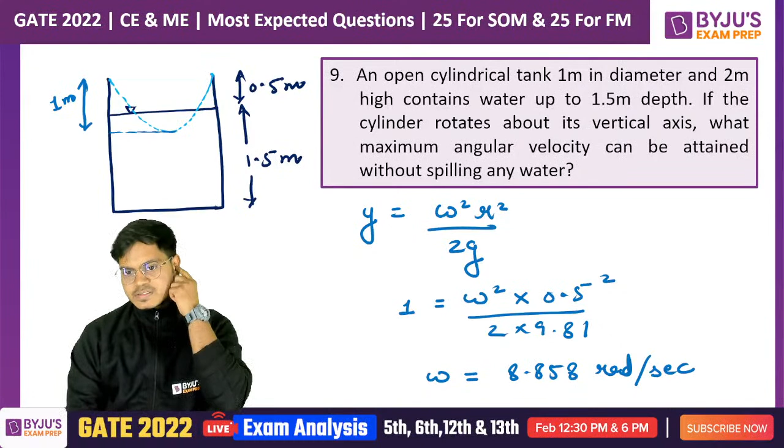Am I going slow, am I going fast, or am I going okay? Please tell me. Fast, slow, or okay? Fast. Please tell me.

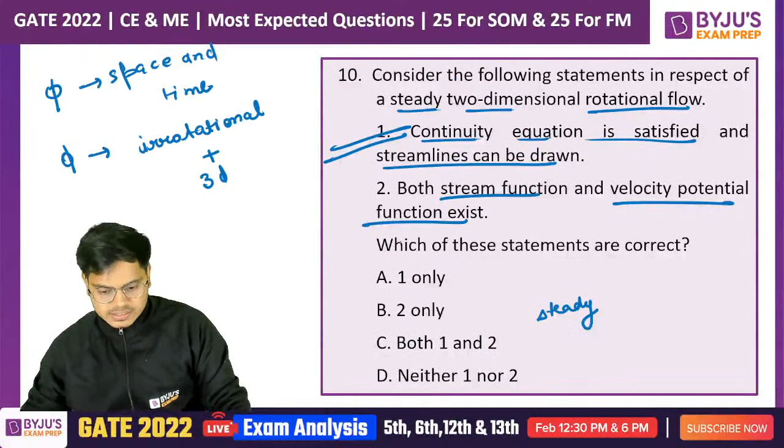Set hai, full power, great. Next question, very easy question, I need an answer from each one of you. Let's see, psi is very shy, that's why it is only for 2D.

Yes Suraj, it was opposite, it is very confusing, that's why I have made a note.

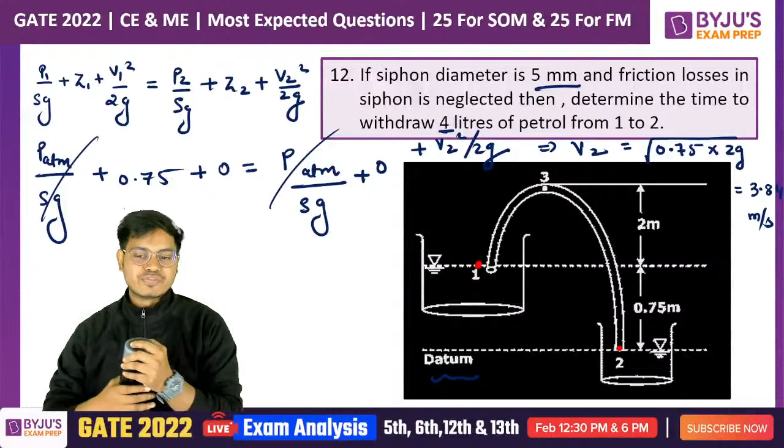Great, everyone, how was the question by the way? Masta? I also like this question. I won't say very good, the next question is going to be very good. Again, come on, how was the question? Tell me, 13th question now.

Can I take exactly 1 minute to explain quickly? 1 minute only I will be taking. So guys, see, there are two types of turbine that you are having, impulse and reaction. The very basic difference is, whatever head we are having in the reservoir is converted into kinetic energy in the impulse turbine. But in the reaction turbine, it is kinetic plus pressure energy also, right?

So what happens in the end? In the end, if the pressure is lower, what will happen? There will be a backflow from the tail race, and when there is backflow, there will be a choking condition. So to remove that choking condition, that is why we are having this, right? To increase the pressure, as Suraj has said. I have said the same thing but in a longer way, right?

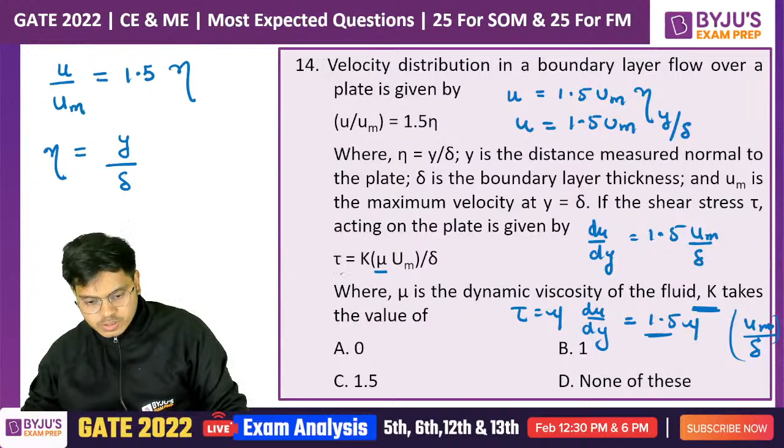Instead of du by dy, I'll directly put um by delta. So from here, if you compare these two equations, the value will be 1.5. Set hai kya? Everybody? Superb.

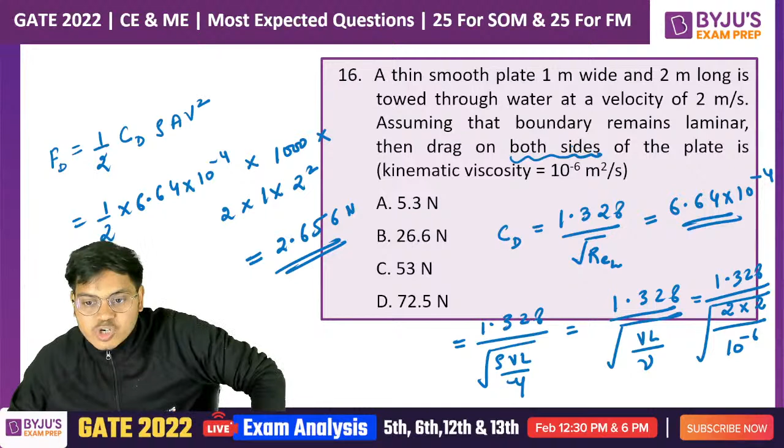Is it correct? Everybody, are you getting the same answer? This is wrong, by the way. Why? Because we want the answer for both sides. Okay. Turbulent flow, sir? Neeraj, they have said it: assuming the boundary remains laminar. When they are saying it upfront, I have to consider that, right? So since they are asking both sides, into 2, and that would be 5.312 Newton. Everybody, beautiful. Next question.

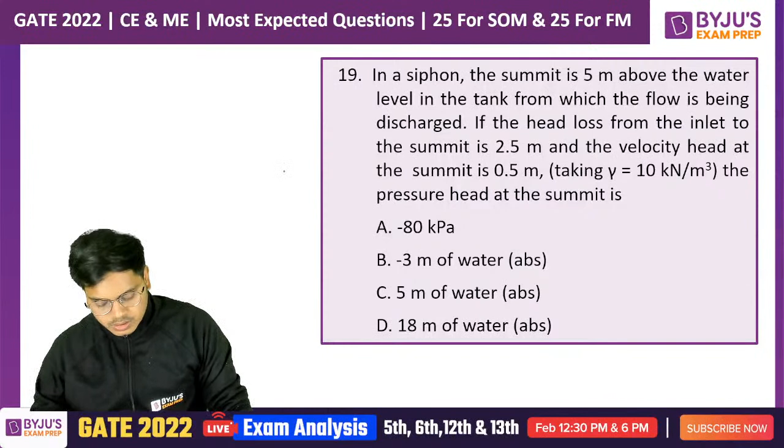I'll tell you how it looks. We have a tank or reservoir. We have a siphon moving like this, attached to a tank which is over here. Something like this. Let's say this is point S, this is point A. It is not necessary to put the name everywhere.

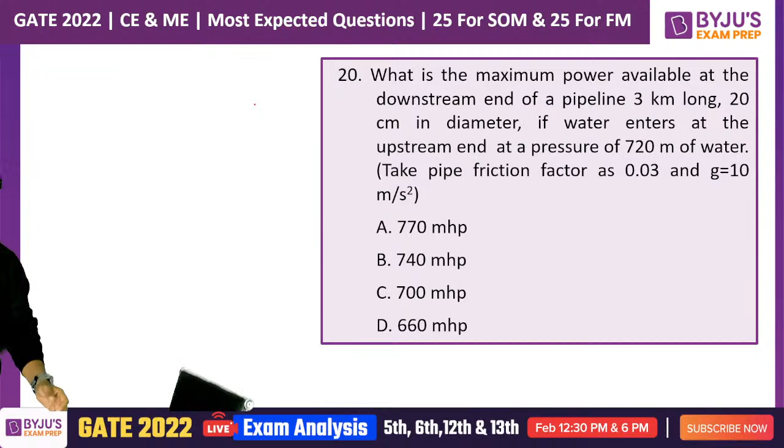Let me show you the demonstration also, na? Wait, the paper. आपके लिए check लेके आया हूँ मैं. Train you with the help of this. Right now, can you see it is falling down? Why is it falling down, everyone? Due to gravity. Correct.

Okay, it is falling because of the gravity. If I blow air here, did you see it lifts up? Right now it is falling. If I just blow air here, it is lifting up. I am not blowing air from below. I am blowing the air from above. It is lifting. Why? Why is it lifting?

Because I am increasing the velocity here. As the velocity increases, the pressure decreases, and as the pressure decreases, it tries to come to the lesser pressure from the higher pressure. Samajh gaya kya?

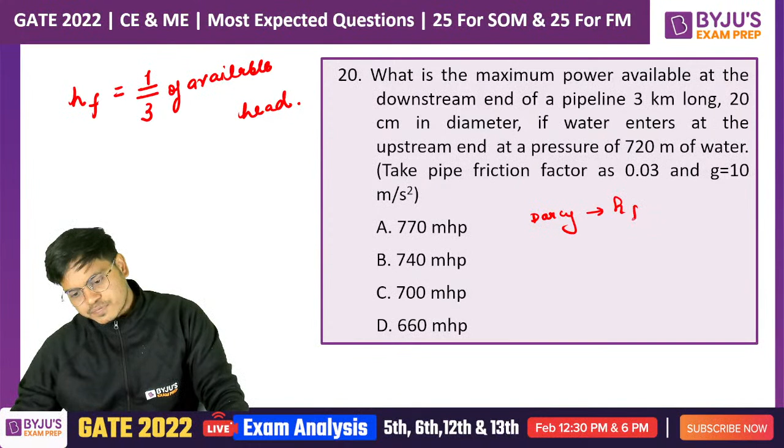Okay, let's first find out the value of discharge from here, then only I'll be able to find that, right? So what is going to be the discharge, everyone? I can use the Darcy-Weisbach equation. Can you please tell me the Darcy-Weisbach equation? Civil students know this, I hope mechanical also knows this. Still I'm asking you. Darcy-Weisbach equation is utilized to find out the value of head loss due to friction. So does the Hagen-Poiseuille's equation. So please tell me, out of these two equations, which one I should use when they both are doing the same thing?

If I want to get the value of discharge, it will be F L Q square by 12.1 d raised to the power 5. HF will be how much? Total head is 720, 1/3 will be 240. 240 equals F into L Q square by 12.1 d power 5. F is 0.03, L is 3 kilometers, so 3000 into Q square divided by 12.1 d power 5. Diameter is 20 centimeters, 0.2 power 5. So the discharge value that I'll be getting is 0.1016 meter cube per second. What are we getting? Please tell me, everyone.

Sir, in question 18, why don't we consider loss at entry? Because they have asked at B, and second thing, they said there is a pipeline ABC. They did not say that it is entering from a tank or something else. They have talked about this simple section A to C, and at B they want the answer, they wanted the loss. That's why we did not consider it. Otherwise you will say, sir, we should have considered the exit loss also, but we did not.

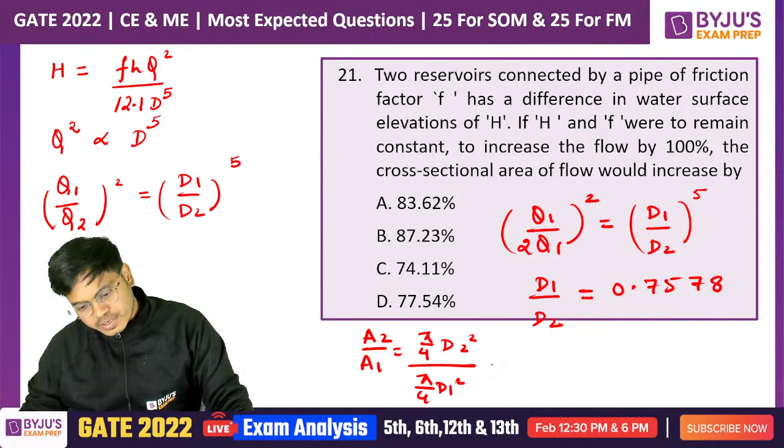Let's get the value of area. A2 by A1 should be pi by 4 D2 square by pi by 4 D1 square. From here we'll get it as D2 by D1 whole square.

Can you tell me the value of D2 by D1 whole square? So reciprocal it and square it, it will be 1.741. So from here we can say A2 equals 1.741 times A1. Right, A2 A1 relation I have got.

So percentage increase in area will be A2 minus A1 by A1 into 100. Put the value and get the answer. A2 is 1.741 minus A1 by A1, A1 common, so 74.11 should be the right answer.

How many of you got the same answer? C is the brilliantly correct answer. Neeraj, Santu, great, great job.

Next question: For a fully developed laminar flow of water whose dynamic viscosity is 0.001 Pascal second through a pipe of radius 5 centimeter, the axial pressure gradient is minus 10 Pascal per meter. The magnitude of axial velocity at the radial location of 0.2 centimeter is how much?

For that you need the equation for velocity distribution in a pipe, that is minus 1 by 4 mu del P by del X, for the pipe, R square minus r square. Put the values and get the answer. This is a very simple question.

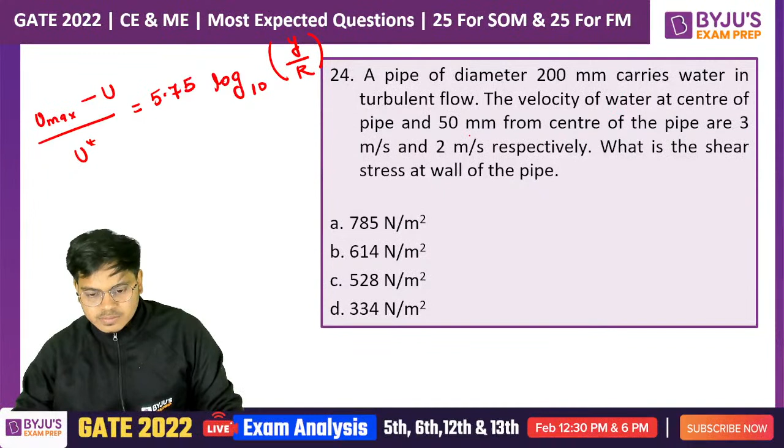So the velocity at the center is 3, the maximum velocity is 3. At the point 50 mm from center, velocity is 2 meter per second.

U star equals 5.75 log base 10. Okay, y value will be how much? Velocity at center, 50 mm from the center.

So if it is like this, diameter is 200 mm. It is 200 mm, right? And it is 50 from here, so it is 100. So the remaining will be how much? Please tell me the value of y.

The value of y that I should keep here: y is simply nothing but r minus small r.

So that is how much? R, the radius, is 0.1. So 0.1 minus 0.05, correct? So this is the value of y. I have kept the value of y. Please let me know everyone, quickly everybody answer to this question.